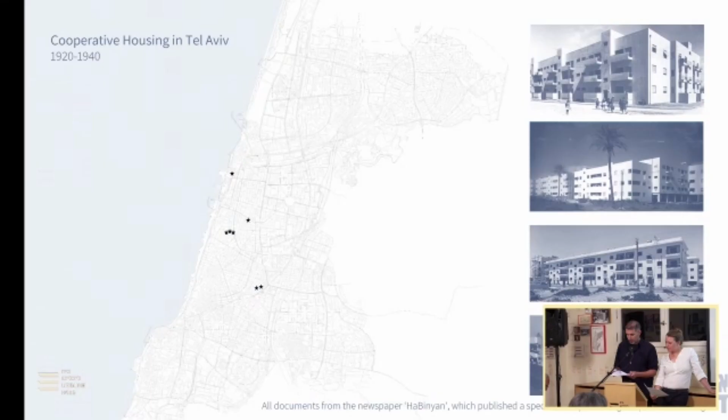We were happy to discover that cooperative housing is not a new idea in Tel Aviv. About 100 years ago, workers' housing complexes were already being built here by independent cooperatives without government support. Through shared responsibility, efficient use of space, and shared services, workers were able to create high quality and affordable housing even in Tel Aviv.

Thus, there were two main and successful models called the Comb and the Wall. The Comb layout provided excellent natural ventilation for all apartments and created open, shared outdoor spaces. The Wall layout was organized around a shared courtyard that became the social heart of the community and symbolized both community life and a connection to the land.

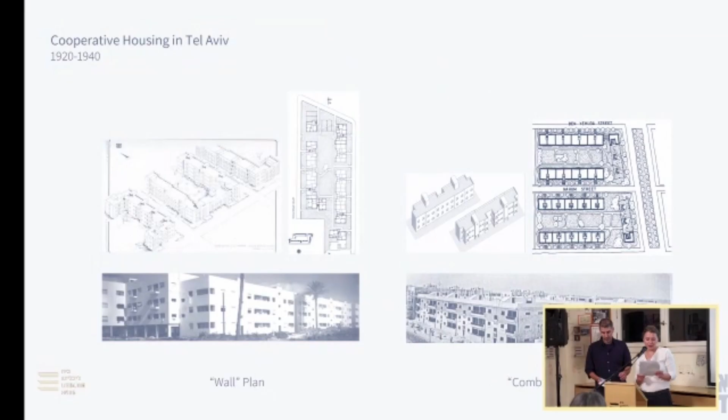These housing projects were designed by architects, many of them immigrants from Germany, and influenced by the Bauhaus movement. The architects were selected through public competitions in which future residents were also represented. Residents were active participants in the process, and the main goals were quality of life, efficiency, and simplicity, as you can see in the picture.

As part of the design process, architects carefully studied the local climate. The result was an apartment layout that still influences housing design today: a generous living room connected to a balcony, more compact bedrooms, and utility spaces in between.

We also looked at contemporary examples from abroad. One of them is Spreefeld in Berlin. The project grew out as a resident protest against a large urban development plan.

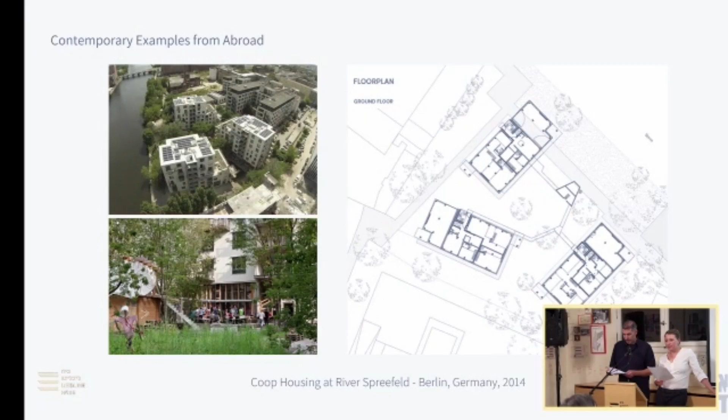During the struggle, the community formed around the idea of cooperative living and open urban life. These residents themselves initiated, planned, and developed the project as a cooperative. As a result, the building includes shared kitchens, workspaces, gardens, and public access spaces that encourage interaction and community life, both among residents and with the surrounding neighborhood.

Another project we studied was located in Denmark, and unlike Spreefeld, which grew from activism ideology, this project was created by a group of families who simply wanted a stronger social connection and more cooperation in everyday life.

The architecture strongly reflects this idea. The building is organized around a large central courtyard with an open facade facing inward, while the facade facing the street is more closed and private.

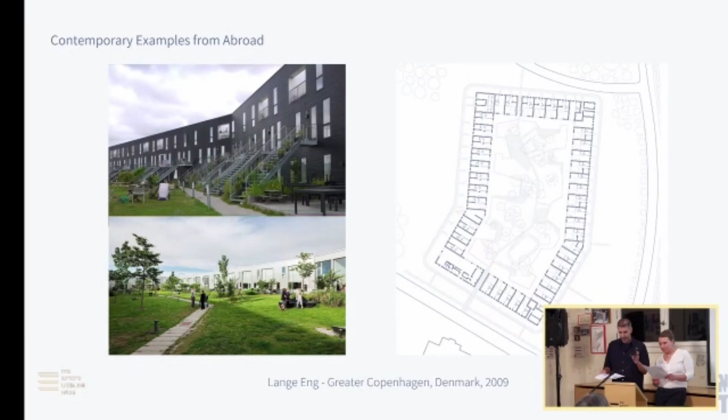As we mentioned before, our task was to help the municipality understand the planning possibilities of the site. The starting point was very challenging and a bit disappointing: a large site of approximately 2,500 square meters, around 120 housing units, and no existing community to design for. So we had to think carefully about how to create cooperative housing for a community that did not yet exist.

To avoid a tender that would only suit a large organization, we explored 3 different planning options. After evaluating them, we decided to move forward with the second one, which divided the project into several buildings. This approach allowed smaller groups of communities to participate as well.

Similar to the Spreefeld project in Berlin, we created an open and shared courtyard that encouraged movement, interaction, and connection with the neighborhood rather than a closed residential compound.

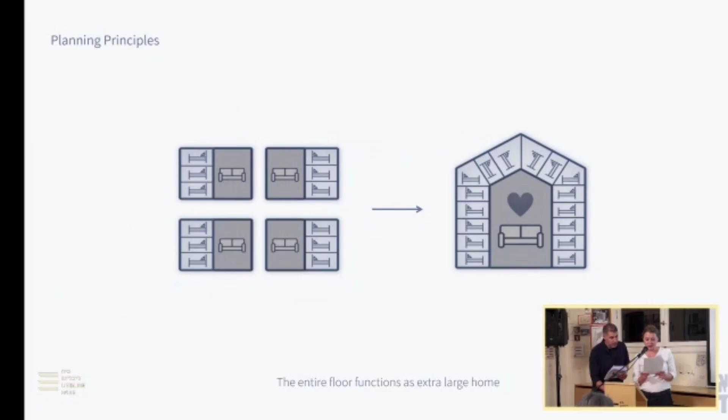Because cooperative housing is based on households that are not related to each other but still share parts of everyday life, we decided to reduce the shared spaces inside the apartments to a minimum. Instead, we created shared spaces on every floor. As a result, each floor functions as a large shared apartment.

Basically, when residents leave the elevator, they enter directly into a shared living space with a kitchen and lounge area rather than a narrow corridor. This gives the public space real meaning and makes it an active part of everyday community life.

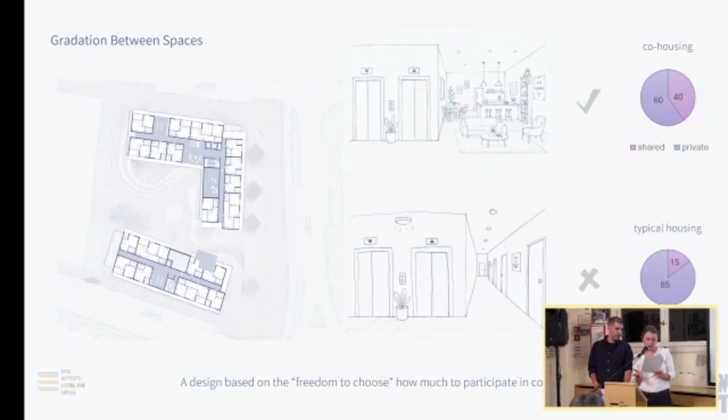In this case, about 40% of the building is shared space and 60% is private space, while in typical residential buildings the ratio is usually closer to 15% shared space and 85% private space.

Another important topic for us was flexibility. Each unit was designed using a fixed grid that allows the community to grow and change over time. This provides a solution for different household sizes and different stages of life.

Combining different apartment sizes on the same floor creates a diverse mix of residents - individuals, couples and families - and supports a rich and diverse community.

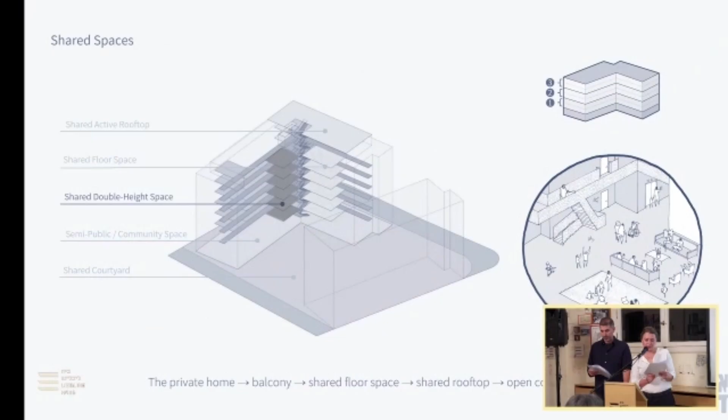So the entire building, as you can see, is organized around a large network of shared spaces, including an open courtyard connected to the neighborhood, shared indoor and outdoor spaces for residents, and double height spaces that connect pairs of floors and create smaller communities within the larger building.

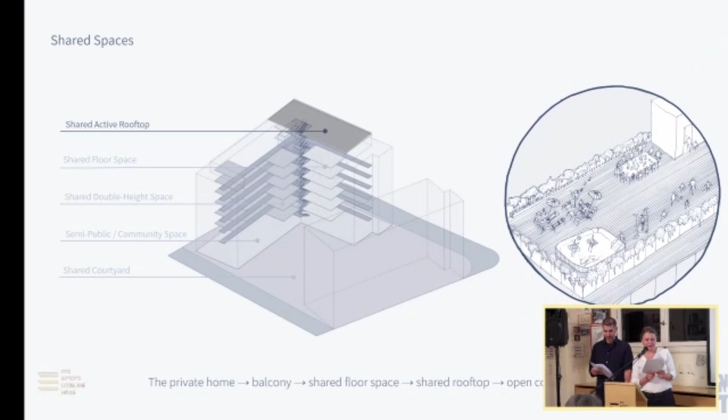There are shared kitchens, workspaces, and playrooms on every floor, and a rooftop terrace open to all residents.

The building facades were designed to explore different ideas of openness and community. One option was to emphasize the private units and the shared balconies, and the other features a continuous balcony that inherits a stronger sense of community and encourages everyday interaction between residents. The plan, I have to say, is the same - it's just the version of the facades.

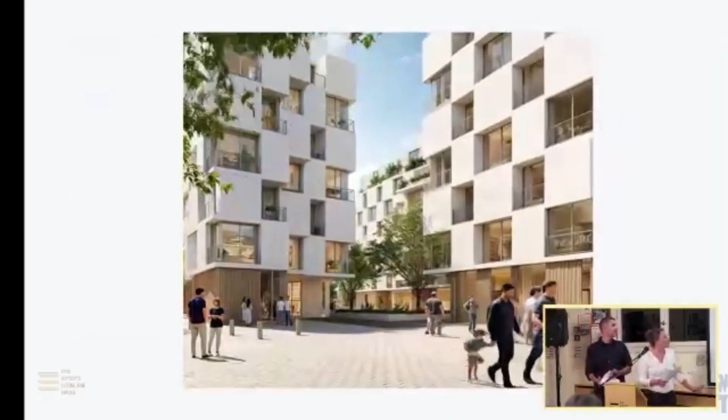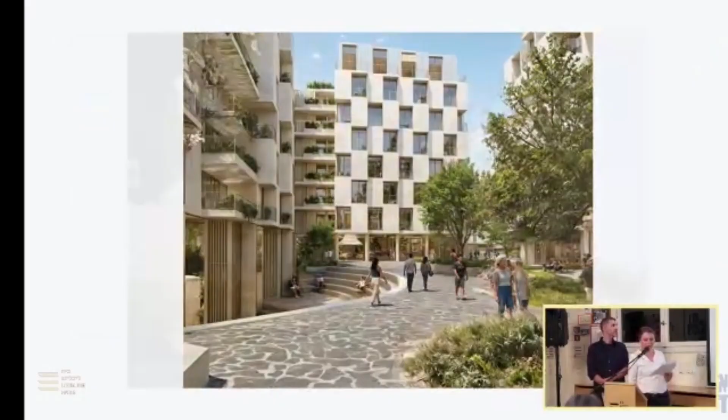So in the end, this project is not about inventing a completely new way of living. It's about rethinking an old idea, such as community, cooperation, and solidarity, while exploring how architecture can create the conditions for communities to thrive in the city. And perhaps it's also about designing places to help people connect, belong, and overcome the growing sense of loneliness that many people experience in urban life today.

So we hope that whoever wins the tender will succeed in creating a new way of living in Tel Aviv. That's it for now. Thank you very much.

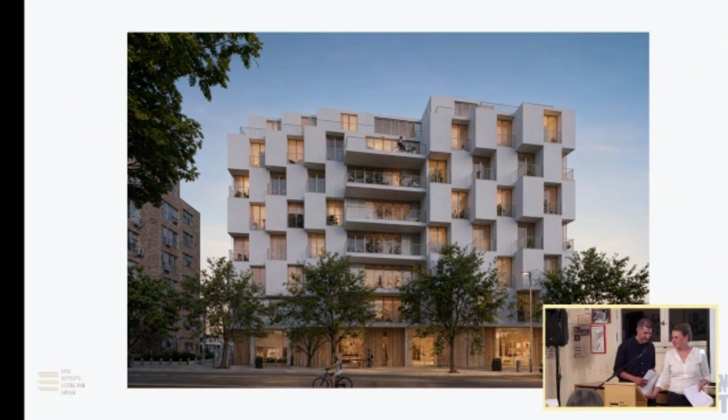Thank you so much. Thank you, Thoma and Ani. It sounds like a lovely place to live in, and you'll see later that we have nearly the same here in Frankfurt, or close to Frankfurt. It matches perfectly.

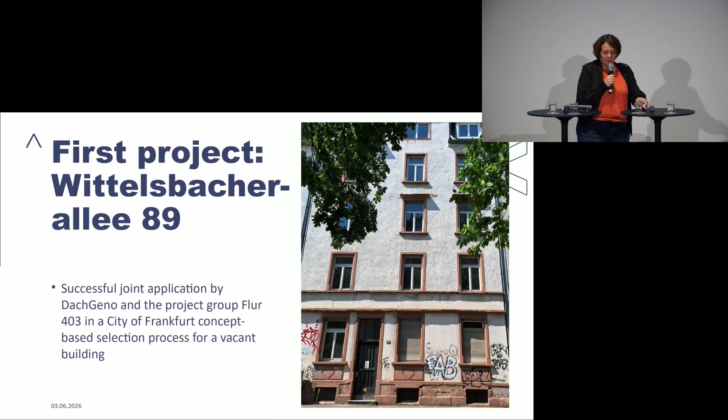And I will tell you a little bit about the project as well. So first, I will not talk about the specific planning, but more about the group and the concept. It's an intergenerational concept.

For us, it was important to have a diverse group that wants to live in this building, with people with different ages and backgrounds who can live together and support one another. On the other hand, it was important for us to focus on long-term affordability. As a cooperative, we will not get profit from the rent paid afterwards, and we have a collective ownership structure, and we will also provide public housing subsidies so that rents remain affordable in the long term.

Also important for the concept: this is a very old building, as you can see in the picture, and we want to bring it to a more sustainable development. We aim to combine ecological building practices with viable solutions so that this building will no longer have such high CO2 emissions.

To the more specific planning, I have some key features of the project I wanted to talk about. It's not as big a project as the one we saw in Tel Aviv - it's only a small house, containing 10 apartments. But we try to design flexible layouts for different household types.

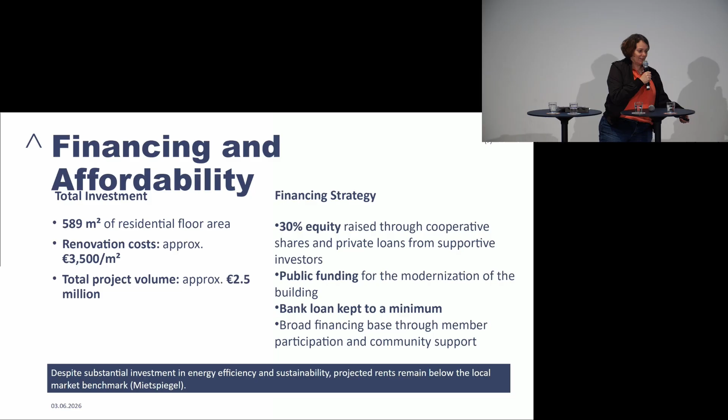And this is, I come to an end now. I think I already talked. No, it's the other way around now.

The last thing I can say is, if you want to support our mission of becoming a greater player in the Frankfurt area and purchase as many buildings as possible in the near future, you can become a member, because we want to add on the idea of cooperatives that was already developed in the 1920s and become a strong cooperative, or you could even invest with a small private loan. Thank you for your time.

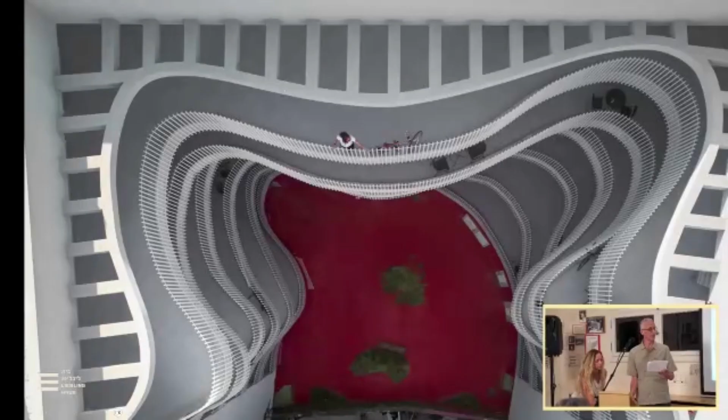When we think of an urban kibbutz, we usually picture communities that come together around a clear ideology or shared vision. But tonight I want to talk about a community that grew from completely different soil, out of need and scarcity - how planning constraints and architectural decisions can actually create a community.

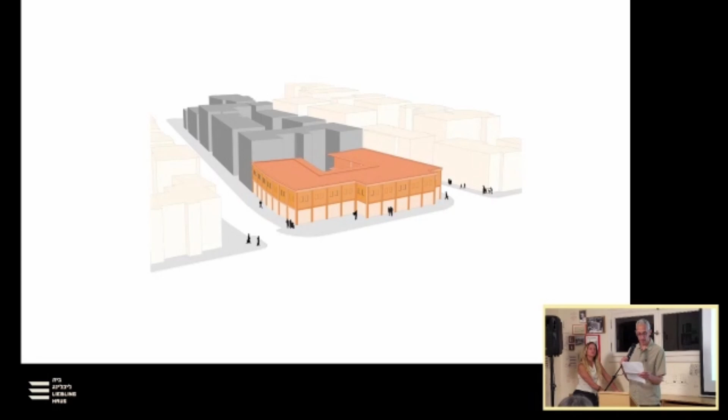So in 2010, when the buyers of the lot approached us and asked us to plan a residential project on this site, we took the task very seriously. We realized this was no ordinary project. The question was not just how to build a new building, but how to heal a broken place. The lot size is 1,000 square meters, with 3 facades facing streets and the 4th facing neighboring lots.

One of our first challenges was that not all the residents agreed to leave. After a long negotiation and a legal process, we understood that we had no choice but to keep a small part of the old structure, which was occupied, and build a new building on top of it.

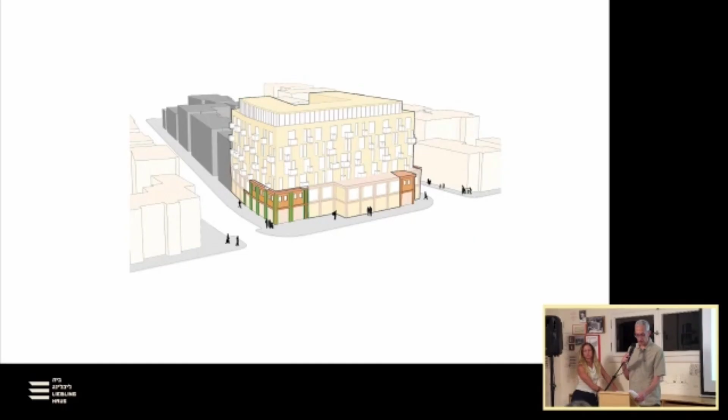The client's requirement was small, affordable units of about 50 square meters, meant for young professionals. The zoning for this area allowed for a commercial ground floor with 5.5 residential floors above it. The building rights allowed us to build 55 housing units of this size.

So how do you fit 55 apartments into 5.5 floors and still allow cross ventilation for all of them? Our main design decision was to break away from the standard Tel Aviv typology. Instead of a closed block around a central core, we chose to invert the box. We pushed the building to the street lines and designed the apartments around the inner courtyard.

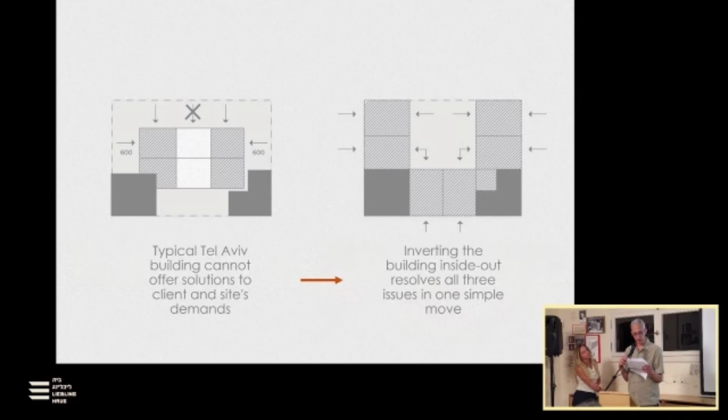The typical floor plan includes 10 apartments. Each unit is around 50 square meters and includes 2 bedrooms and a living room. The layout allows all the apartments to get cross ventilation.

On the top floor, we designed 5 slightly larger apartments. Yeah, this is the top.

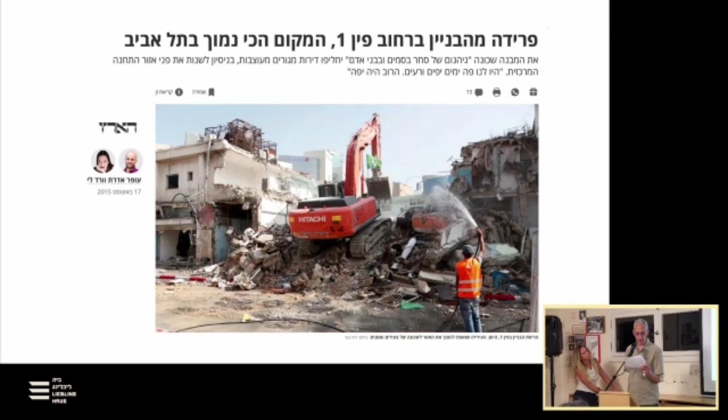In 2015, the demolition of the old building began. It was a major media event that was even broadcast live. Here you can see the building during construction and how we suspended the new structure over the parts of the old building that remained.

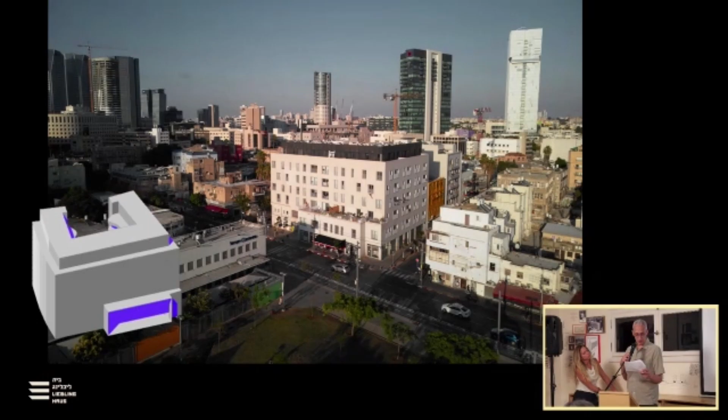And this is the finished building. The exterior facade is white and minimalist, typical to Tel Aviv, so the building blends quietly into the street.

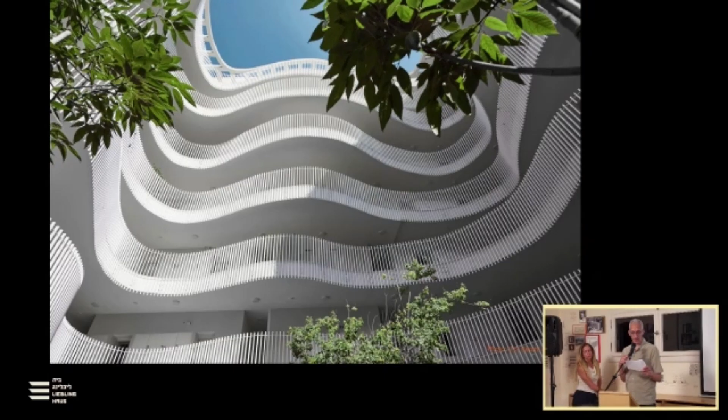Because we built right up to the property line, we couldn't plan private balconies for the apartments. So instead, we widened the open corridors surrounding the courtyard to create useful spaces for the residents.

These inner balconies were designed with a wavy shape, creating movement and constant eye contact between different floors. When a resident steps out, he can see his neighbor next to him, as well as those above and below. The balconies were designed to shade the open inner courtyard, creating a pleasant microclimate for most of the year.

The shading system and cross ventilation were not just about making the building green. They were mainly about making it more affordable.

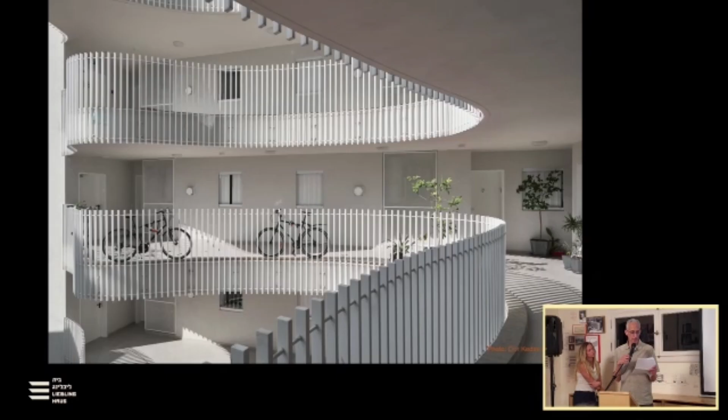The lack of private balconies turned from a constraint into an opportunity. It forced all outdoor life to gather inside the shared courtyard, which became the key factor in creating the community dynamics. Daily actions like smoking a cigarette, watering a plant, or talking on the phone happen within the community space.

white exterior that helped the building blend into the street. This contrast defines the border between the city and the home, creating identity and belonging.

Construction was finished in 2020.

Back online. Hey, Sharon, can you hear me? We lost you. Okay, we don't hear you yet. I can see myself from behind. That's creepy. Okay, still working on it.

While we do that, I just thought, don't you think an aspect is also that you can put your money somewhere and do good? You said it's for education, but if you have money and the alternative is to give it into an ETF and pay, say, Rheinmetall or any other weapon-producing company your money, and you know what they do with it. The alternative is to put it into a project like this, and you can walk along and take a look at what your money is doing. Don't you think that's also an aspect?

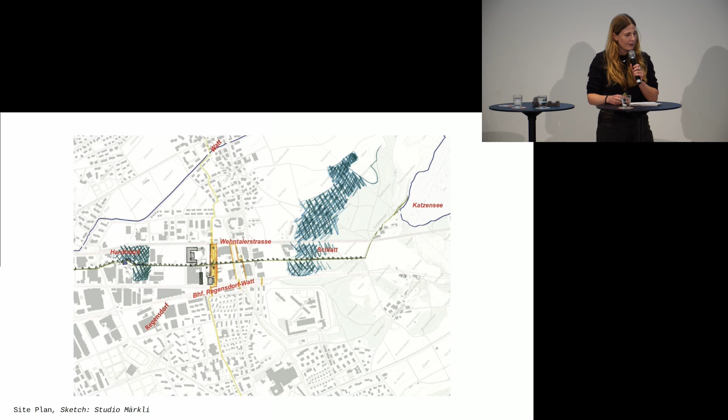Zwhatt is part of a development area in Bahnhof Regensdorf-Watt. Regensdorf is about 15 minutes away from Zurich main station. There are 17 plots along a big promenade in between, which connects two nearby recreation or greening areas. You can see it here on the sketch: Schlatt and Harthölzli, and the promenade is the connection between them. Our client is the Pensimo Management Group, and they developed the Zwhatt area alongside this promenade on several plots.

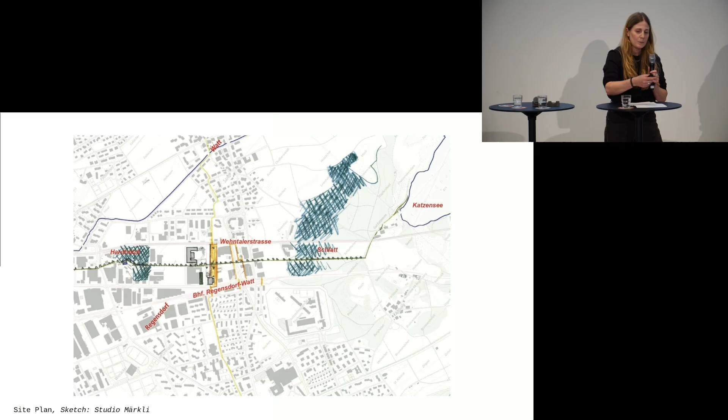There are two plots named H and G. They are more or less completed, and the first tenants moved in 2025, last year. And there's another one where the planning is ongoing, and there were some competitions last year which were won by Salate Architects from Basel and Doskre Architects from Zurich. And Zwhatt itself is based on a master plan by Peter Märkli Architects.

You can see one of the first sketches from him here behind me. And Studio Märkli was also in charge of some of the buildings on the area on plot G on the right, including the second high-rise and also a lower residential building aside with a kindergarten, which we call the Querbau. Same situation here, a different view. We can see the high-rise from Peter Märkli Architects and also the Querbau aside with the kindergarten and a big loggia in front.

Behind there's a commercial building from Graser-Troxler Architects. And you can see it on the bottom right picture, on the face to the promenade, on the corners of those plots, we have two pavilions from Alexander Brodsky. He's a Russian architect, and he developed those pavilions for the tenants.

On the first pavilion, you can see it here, we have a big cinema on the roof, and also some guest houses or guest flats to rent for the inhabitants. And on the other pavilion, we have a sauna, an event hall, and also a roof garden, which can be used from the whole area.

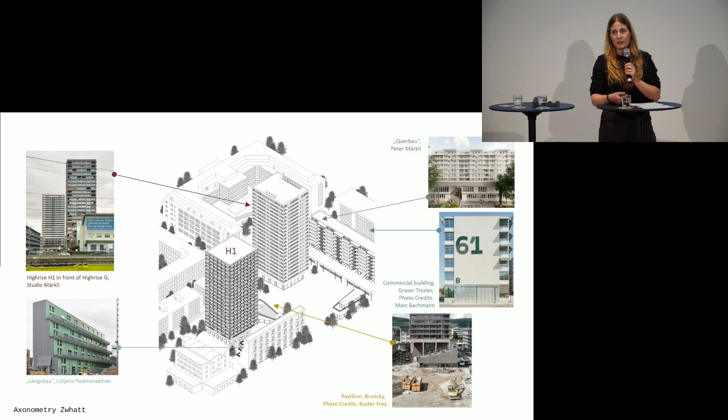When we talk about those two high-rises, we like to talk about them as brothers and not as twins. So they have a lot of similarities. You can see it here. They have the same height, exactly 75 meters, also similar proportions and dimensions, and they also have exactly the same color, this brownish red. This is one of the most published visualizations of the project.

But there are also a lot of differences, not only similarities. And the biggest difference for sure is that the Peter Märkli building or high-rise is a solid construction, while H1 is a timber concrete hybrid construction. And with its 75 meters, it's the highest timber high-rise in Switzerland for now.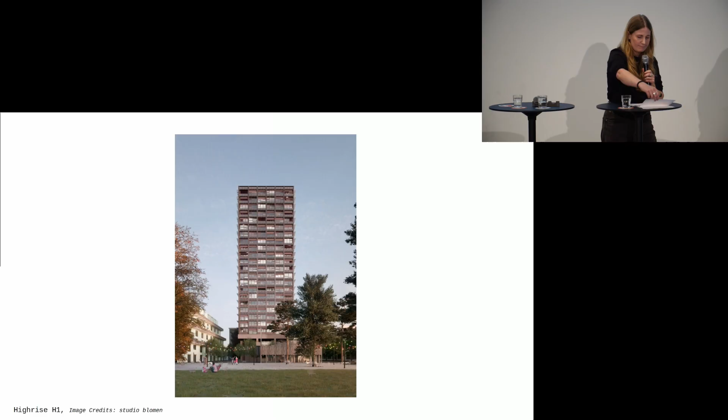In the base, there are mainly uses for the residential purpose. We have mailboxes, the entrance, and also space for a restaurant or a bistro. On level 1 and 2, there are co-working spaces. The 156 apartments, ranging from 1.5 to 5.5 rooms.

Starting from the third floor on, they are puzzled in, or find their place in this wooden structure. It's a light timber structure on 21 floors, which is basically puzzled around the core element per element. You can see it here.

The wood we used is beech wood, but it's not the classic Baubuche. I really don't know the English word for Baubuche, maybe someone knows it. Baubuche is basically beech wood, but it's laminated in thin layers with a lot of glue. In this case, we have squared timbers of 40 by 40 millimeters, and the product is called Stabbuche and is made from 100% Swiss and local wood. In comparison to the Baubuche, there is much less glue, so we preferred this product.

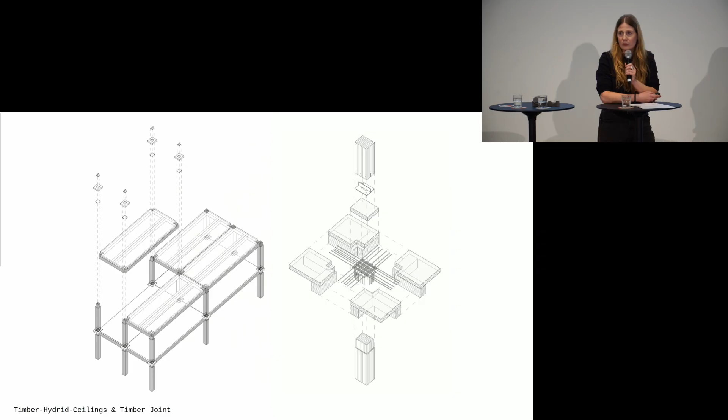Let's go to the detail. We can see here that the timber construction was prefabricated. So we have wooden columns and also timber composite ceilings with 12 centimeters of concrete on top of 30 centimeters of Stabbuche beams, wooden beams. The ceiling elements are connected to each other with a timber joint, and in the end you get this rigid floor.

Because of the high level of prefabrication, we only needed 1 week per level on site to erect the building. With only a few hands, the elements were brought to place.

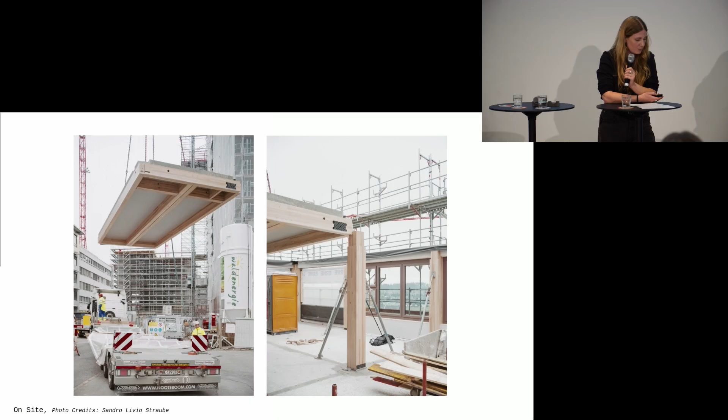Due to the fire regulations, the timber isn't visible from the outside. But inside the apartments, as you can see in those pictures, the timber becomes a defining architectural element or feature. Fire safety also plays a role here. The reason we are allowed to expose this timber is because we have a sprinkler system on the floor, which is not quite common in Switzerland for housing. You can see it here in the image - it's more like an ornament, not that bad, I think. It's industrial, but it fits the look of the building. We wanted to show the construction, so this was the only way to do that.

We have also a few figures here. By using timber instead of concrete construction, we had approximately 20% less CO2 emissions compared to regular construction, that's around 600 tons. Additionally, we had 1,500 tons of CO2 stored in the timber itself.

Now, a few words about the facade. The facade of the whole building reflects the inside structure to the outside. So the wooden structure, starting from the third level on the upper floor, lies behind the light metal structure. The most defining element for sure is the solar panel, which you can see here.

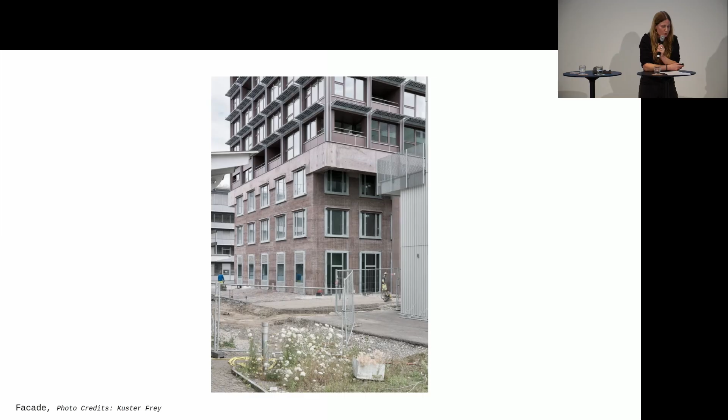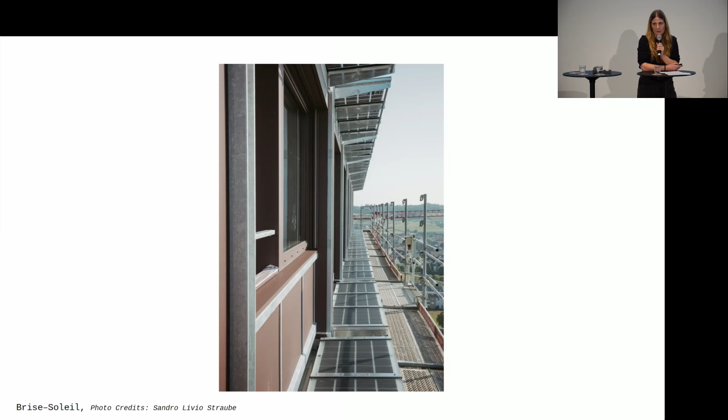Furthermore, the panels provide sun protection in the form of brise-soleil elements. And of course, we really like the architectural expression and the lightness behind it, which comes together with the light timber structure.

Additionally to that, we could also use bifacial solar cells with this kind of construction, which can absorb light from both sides of the panel or cell. Additionally to the extra area we could provide, we now have 10% extra yield just because of those bifacial cells.

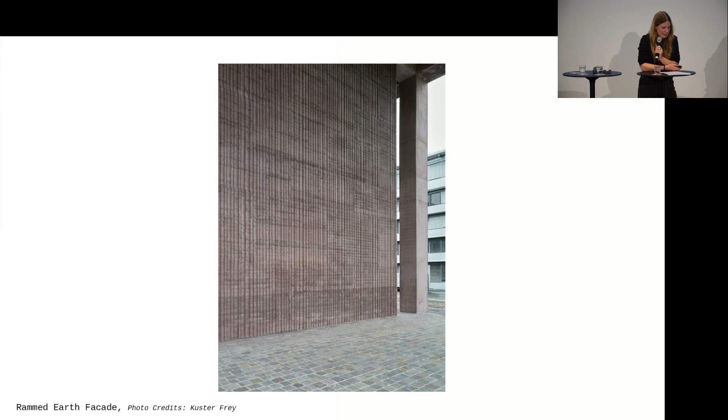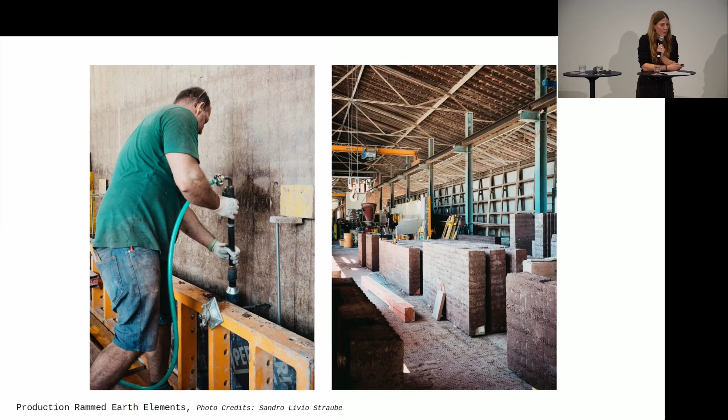In contrast to the fine and technological facade from the upper floors, the massive base comes together with a rammed earth facade out of elements. It's also prefabricated, and those elements were produced by Lehm AG in cooperation with Keller Ziegeleien. After they dried, with a long drying time, and after they were brought into position on site and fixed in place, all the joints were manually filled with clay to get a closed structure.

And with these images, I have reached the end of the presentation. I hope you liked what you saw, and thanks a lot.

I think Tel Aviv is up now. Yes, thank you very much for this inspiring talk. We found that the truthfulness of the material is very inspiring.

Although for us in Israel, maybe wood is not such a choice like in Switzerland, just because of the ecological footprint. But of course, this whole topic of sustainability should be discussed at large in Israel much more than it is up till now.

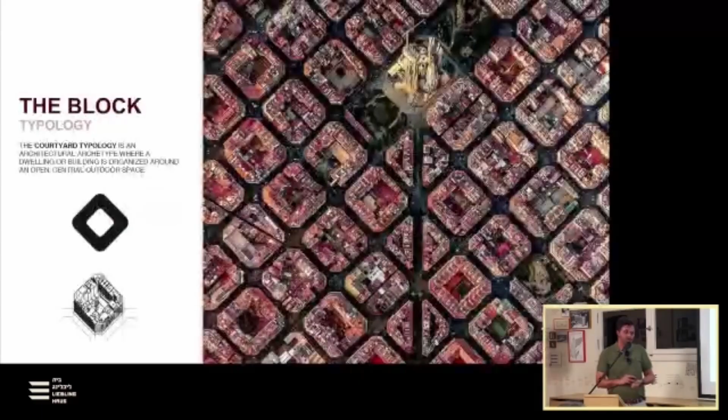We look at old typologies, then we can see the historical block here in Barcelona and other cities in Europe. I think it's a lovely typology stemming from the courtyard house. The great thing about it is it creates great community spaces in the courtyard and a lot of excellent aggregation possibilities for an urban fabric.

However, I think it's got its problems with adding mixed use. I tried and wasn't able to do it well in Switzerland actually, and also density is limited when we go to the block typology.

After the Second World War, I think the most prevalent housing typology was... is there a way to stop this from running somehow and move to a... is it working? Okay good, so let's go forward.

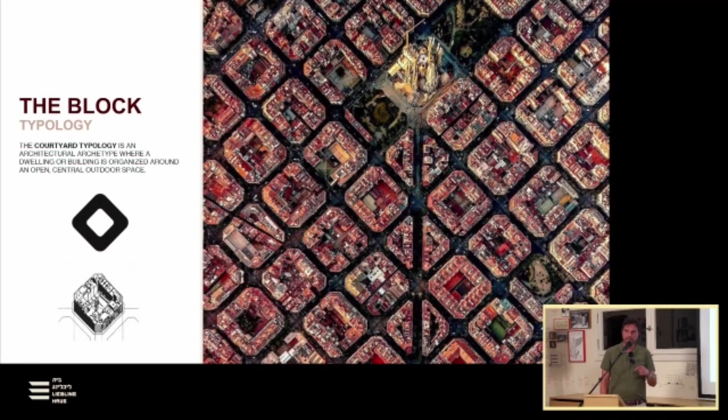One more. Okay, so we were speaking about the limits of the closed block, right? And about the central courtyard, especially with mixed use and also with density.

And we see the social housing blocks. You can see that on Alexanderallee in Berlin, or you can see that in the Eastern blocks. I think what it contributed mostly was, one, it allows more density, and also it created a little bit more public space, since the separation of buildings created community gardens between the buildings. And also it allowed maybe a beginning of a mixed use, since some building would have been residential, some would have been offices. But still it has its limits.

And I think if we move forward, we can see that nowadays this is more of the housing typology that we see in expensive cities. Mostly also not because we think this is the most beautiful image in the world, I think because real estate is expensive, land is expensive.

Thank you very much, Tadana.

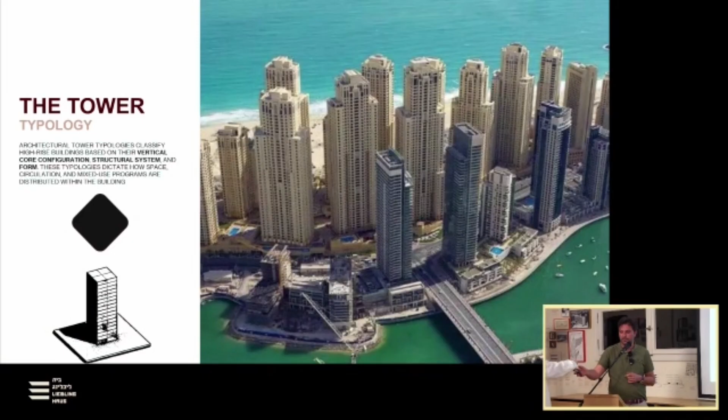And it does allow for a couple of things that our market needs. One is high density, and second is the idea of mixed-use towers. My office is right now under construction on about 15 towers just in Israel alone. So I'm not imagining that we're going to stop doing towers, but I want to say that one of the biggest difficulties is, I think, community.

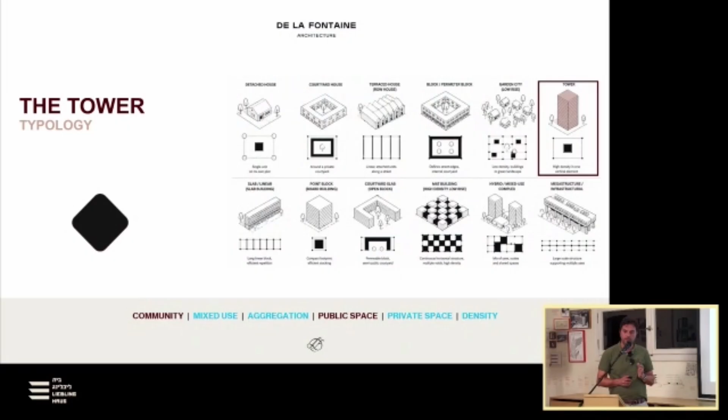People who live in towers are very isolated, lonely, and it becomes a very difficult thing. I remember my father, who's German, said that he hates towers, especially in Frankfurt, next to the beautiful Römerberg and all of the other parts of the city.

And yeah, now I do a lot of towers.

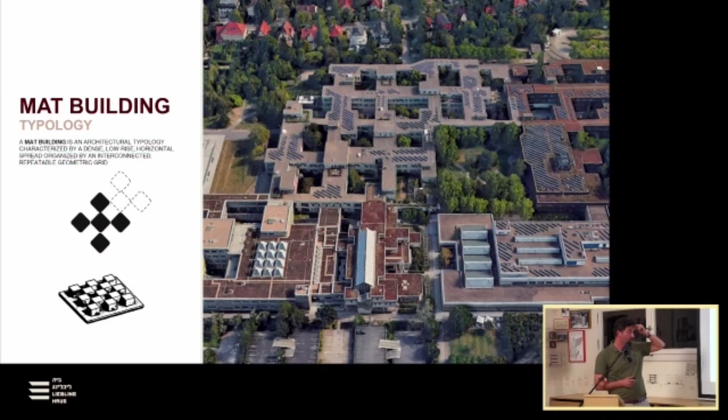Here we see a mat building, a typology that I first learned about during my studies at Yale University in the US. When you look at the mat building, we know here, we see the Free University in Berlin, but there are many other examples.

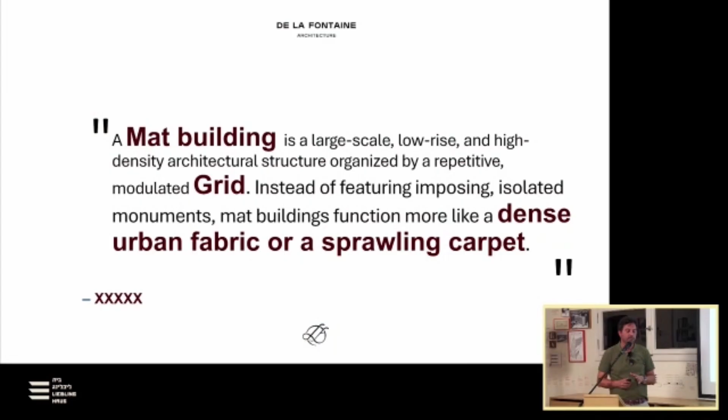It is more of a fabric approach of architecture. It has a lot of opportunities because a mat building is a large, low-rise and high-density architectural structure organizing by a repetitive modulated grid. Instead of featuring a building or a monument, it serves more as an urban fabric, and it creates a sprawling effect as it can grow, creating a lot of pockets of space, which is interesting since it also allows for density.

But here you see the project that I studied during my studies. This was my thesis study at Yale with Peter Eisenman, and you can see historical pictures of the Venice Hospital. That was an incredible project that was never realized by Le Corbusier, which phenomenally sprawls over the canals with its arms and wings.

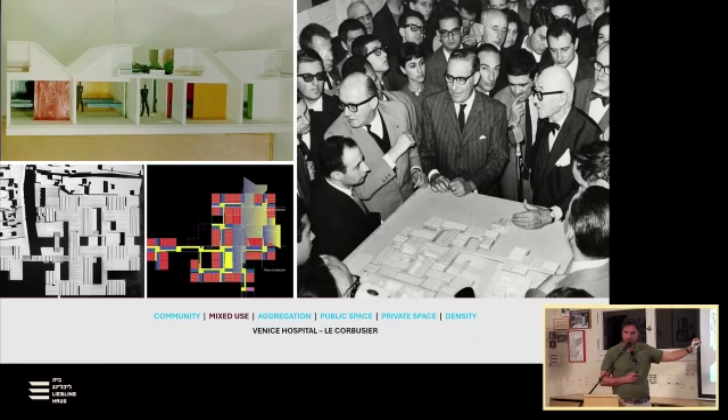The idea was a highly organized bottom-up architecture, almost parametric architecture, with the red being hospital bays with the right sizes, the yellow lines being circulation, and the blue being the service areas. There's also something very asymmetrical about its growth with the pinwheel structure here, but there are many different mat buildings, and how they aggregate is different.

During those studies, my question was, can a mat building actually achieve density and mixed use? And can it actually, rather than just being a public building, which most examples were - schools, hospitals, university buildings - can it actually serve private space?

This was my thesis project. It actually won a lot of awards due to its idea, I think mostly because what was actually novel about this idea was to incorporate social housing over public space.

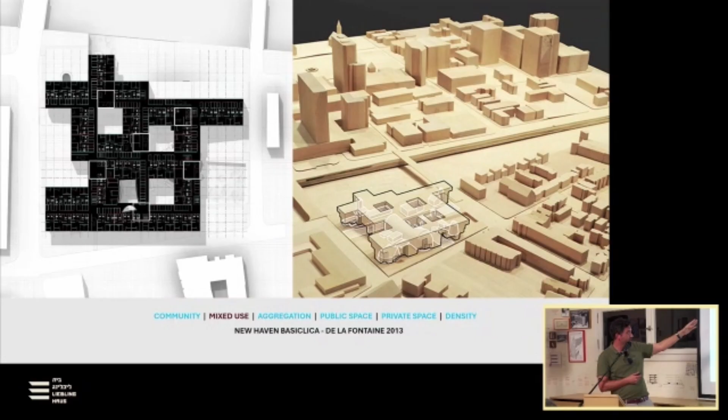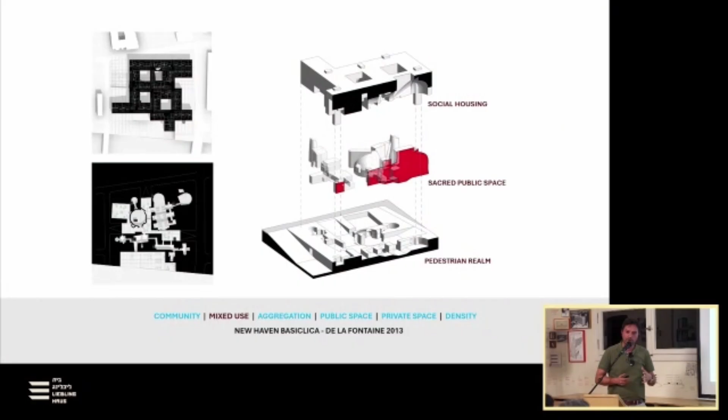The public space below and the private housing on top - you can see that the bays were organized very similar to Le Corbusier's plan, with a pinwheel structure and corridors and depth of apartments with a single loaded corridor. And slowly from below, we see the erosion of public space in a very sculptural way, almost like a Noli plan of Rome, cutting out of this very repetitive and structural idea in a very intuitive erosion, which basically created exciting sections of sacred space on the ground connected to a pedestrian realm that cut through the site.

But that's all good and nice, and we wanted to actually try this in real practice. The real practice was in, I think, 2023, when a client, Landmark Architect, came to me in Belgrade, and they said they had bought an amazing site but couldn't solve it. Multiple architects had tried. It's an amazing site.

It's actually sitting in a historical context, right where the meeting of the two rivers happens, the Sava River and the Danube River, which makes Belgrade very important. The tale of this city has a lot of history from Ottoman and Viennese architecture and struggles and wars, which makes it a very eclectic architectural space.

But also the geography and topography of the city doesn't really allow for towers. So on one hand, they want density. On the other hand, the city doesn't allow for towers. So I had to think of something, and I went back to this thesis project.

Now, what is the public space that we want to bring into this project? No one wanted my basilica from Rome. What they really wanted was something useful to the community in an area of regeneration.

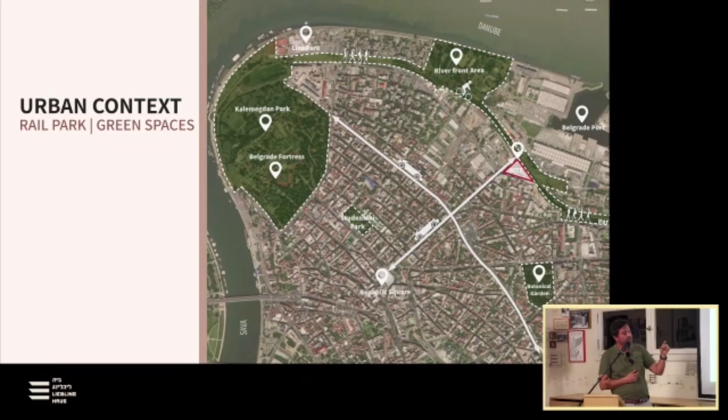There too, they recognized that the old train tracks are no longer used, and could be used as a connection point for pedestrians to move from one park to the next. Development sites along that spine would revive an industrial area, the old port area, where a lot of potential still exists, bringing us to Kalemegdan Park, an incredible historical park of Belgrade on a hillside with its fortress.

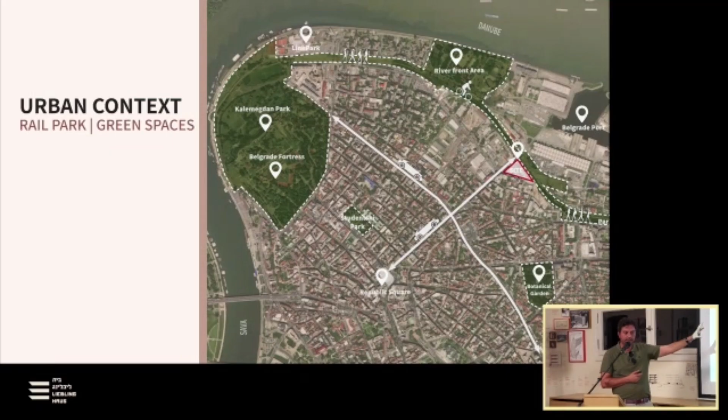The site itself had a very difficult geometry. I won't go through all of it, but there was almost no typology that would allow for the density that was approved. Sometimes a high density approval exists with no way to achieve it, and the landowner buys it thinking an architect can do magic.

The limit was not to go over 10 levels, and also to preserve certain distances from buildings, and allow a fire truck to go around. So these building lines were not even the real building lines — we had to set back even more.

I also want to mention the beautiful neighborhood of Dorcol, a historical neighborhood that's a little run down, but it became the Williamsburg of Belgrade, with bars, pubs, and culture — a very cool, hip area for young people.

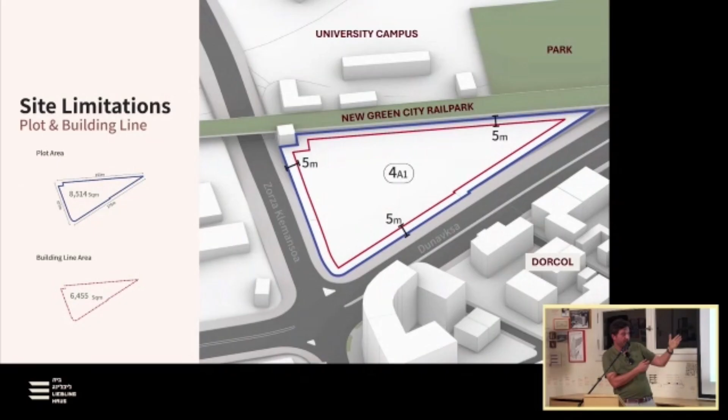On the other side you see the university campus and the park. So we're literally negotiating between public space and private neighborhood on this site — a lot of responsibility for one site in that triangular condition.

The typical closed block was, I guess, the first solution, which we saw in the beginning. But we couldn't achieve it — we couldn't achieve the mixed use, we couldn't achieve the density, and the repetitive long facades were very difficult architecturally.

So we reversed the logic, and instead of the closed block typology, we went into an idea of an open block — basically the mat building I was searching for to begin with.

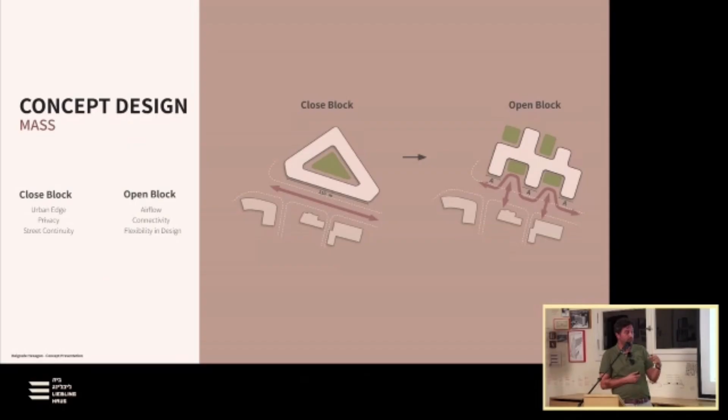In the diagram, the open space, the public space, instead of serving just the tenants, serves both the tenants and the neighborhood, opening to the city and to the park — because the park is very narrow, with bikes coming, so you have to constantly move. We created a break within our site, making public space for people to stop and pause.

I'm in love with this — it actually became a keychain shape for the people who bought apartments. Why a hexagon? Because it's a triangular site. When we tried an orthogonal mat building, we couldn't fit in the areas. But once we acknowledged the triangle and worked with the angles, this was the shape that aggregated and achieved much more square meters and apartments inside the project.

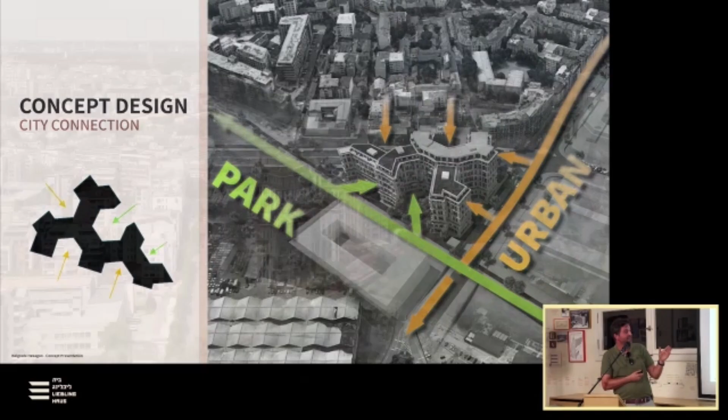Our architects worked extremely hard on the apartments with this shape — here is a rendering of the project. You can see this is an example of what we can do besides towers or bar buildings, while still allowing for high density.

In Tel Aviv, we can do this, and in Frankfurt, we can do this. This project serves so many different ideas at once, while still achieving the developer's goals for mid-income or lower mid-income housing.

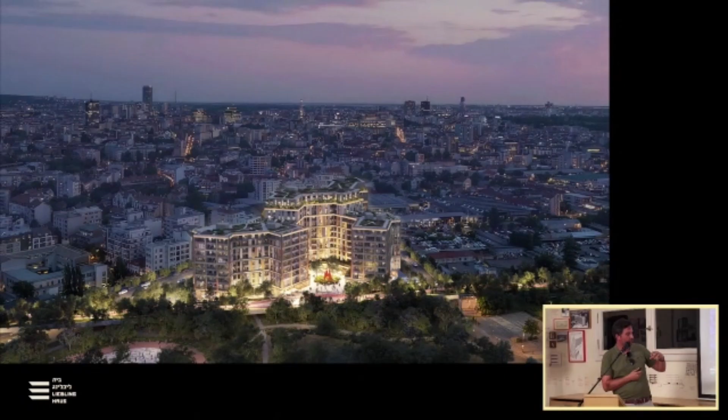I love this image because it shows how the building becomes a portal to the city, pulling people through the site. Here you see the linear park, the rail park, opening up to our building, with the building becoming almost an envelope for public space rather than an object.

We also tried to work with scale — when we looked at blocks and buildings in Belgrade, there was a certain proportion to them, because they weren't built all at once. You'd have a 15 to 20 meter wide facade that changes over time. In these cuts you can see we created a kind of rhythm that has a human scale.

And here we see how that rail park runs right along it, and it creates a really interesting rhythm.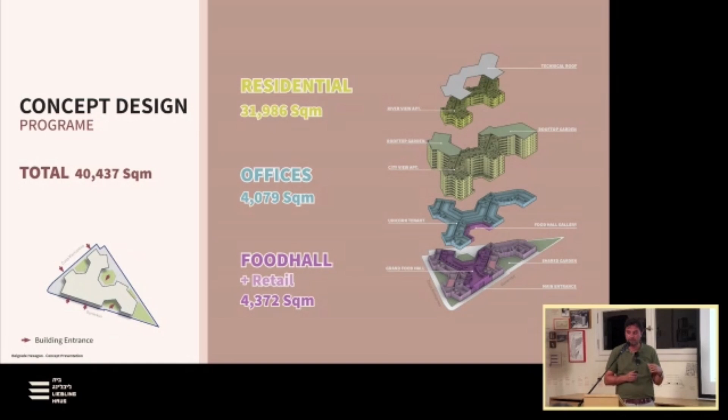As for the private, or let's say enclosed space, there are two main factors we consider: semi-private and public space, which is the couple of lower levels. One is a big food hall, 4,300 square meters, a huge investment by the developer to create a major public space for the neighborhood. On top of that, offices allow this project to survive all hours of the day, so it doesn't turn into a difficult daytime or nighttime experience.

Here you see how we tested this project. We had to find where to enter, how to bring in the cores, how to situate things. So we created 4 fictional characters, 4 architects in my office.

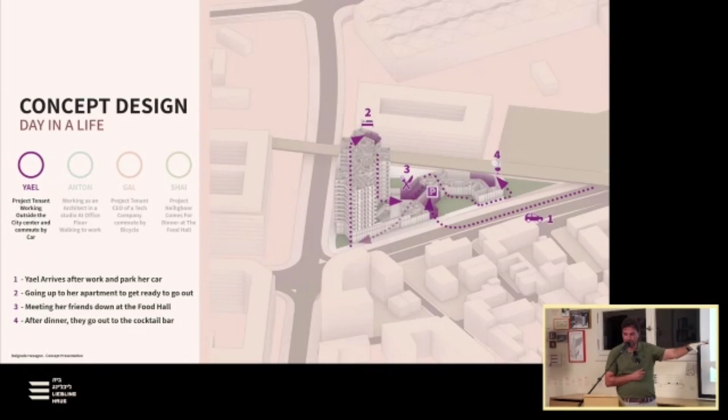Yael is one of them. She imagined herself being a tenant that arrives after work, parks her car, goes up to her apartment, then meets her friend down in the food hall, and after that can just go into this beautiful neighborhood to catch a drink. This is just one scenario.

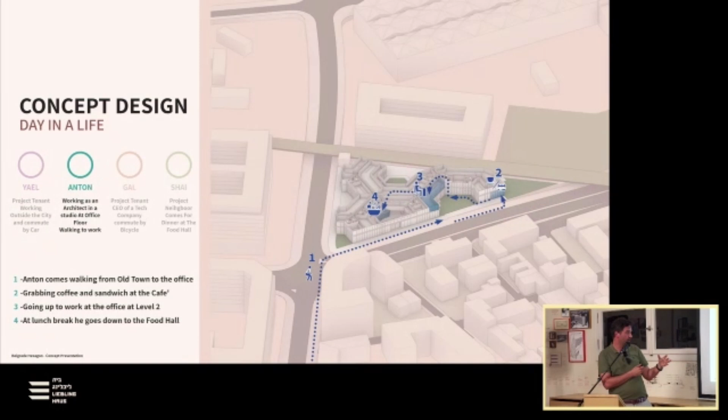The second scenario is Anton, who doesn't live here but comes to work in his office, grabs a coffee in the morning, and has a lunch break at the food hall.

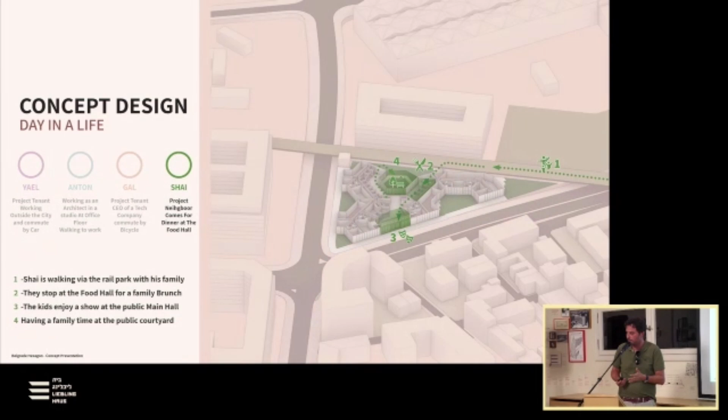Finally, we have a tourist or visitor who comes on the weekend with his family and kids and enjoys the park we've created for a weekend brunch that spills out into the piazza.

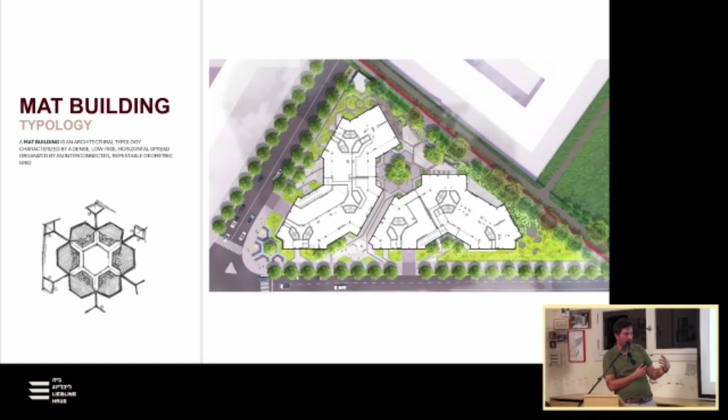When we looked at the circulation, we saw that this building has a very large perimeter, which created a difficult block condition for people. We wanted to bring people through the site, especially because the road on the left has very difficult sidewalks and leads onto an underpass. So people will actually move through the building, which activates the retail, allows for a lot of potential for the restaurants, and connects back to the rail park.

I promise I'm almost at the end. Here we see a rendering of how that building meets the park, and how with that slight angle of the hexagon, it pulls people into the site very gently rather than meeting it at 90 degrees.

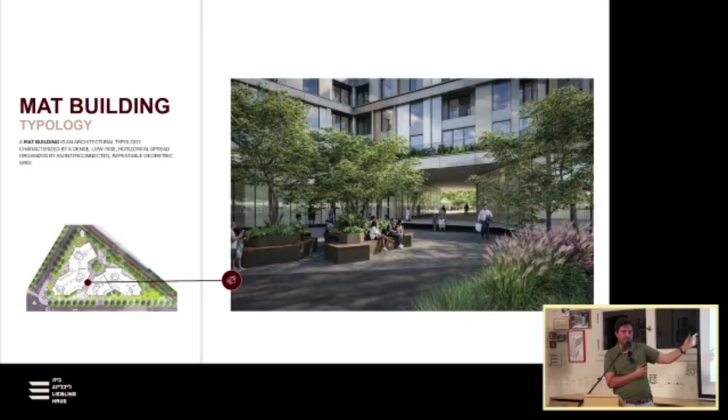Here is the little piazza we see on the park side. We see the underpass, the passage that cuts through the building, and then the piazza, which has an urban feel on the other side.

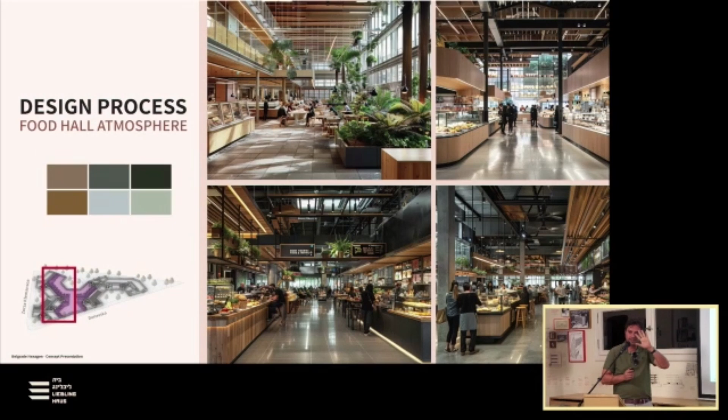Food hall renderings. These were our early food hall renderings for the ground floor, which are completely disconnected from the residential experience above, and activated.

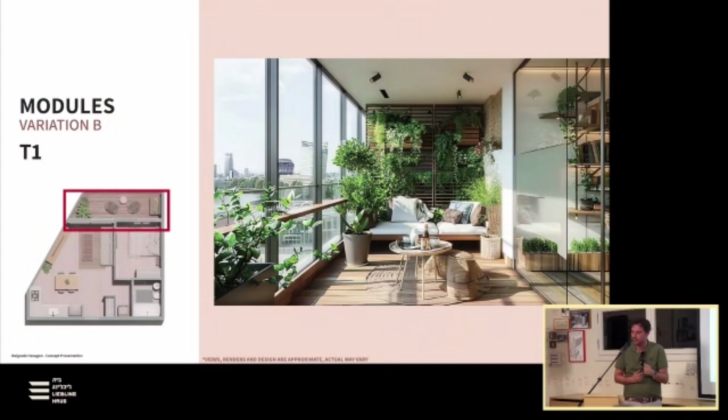That's it. I want to thank you everyone. Sorry for the technical difficulties.

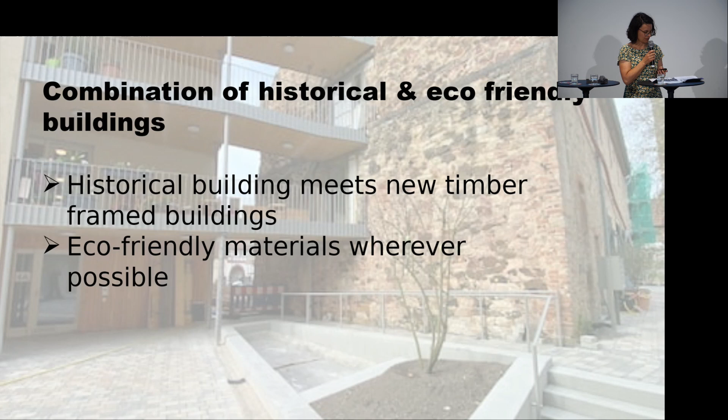The new buildings, as you can see on the next slide, are all timber-based - that's the construction of the new houses we have. They are also certified with KfW 40, which is the new building standard, and we're also looking into a certificate from the Deutsche Gesellschaft für nachhaltiges Bauen, where we might be receiving silver - something very important to us. Those buildings combine private apartments with spaces for cultural events and social interaction.

Here you can see the part of the old building. The doors you can see will be the communal spaces - one part for residents only, financed through the renting costs, and another part will be open to the public that we're still looking into how we can use for cultural events and things like this, so this is going to be interesting. Unfortunately it will only be ready end of this year or beginning of next year, but this still gives us time to think about concepts and how we can use it properly.

The courtyard you can see in the front is already pretty in use in the last couple of weeks. We had lots of birthday parties and events, sometimes private concerts from residents who just take out their music instruments and sit there - it's really, really lovely. The children are playing, we have boule and speedminton dates outside, so it already gives a good sense of community there.

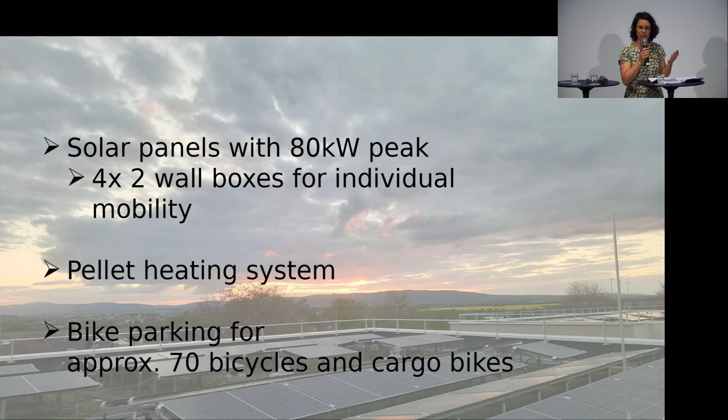Having so many parking spaces and being more or less only with bikes is still pretty rare. We have lots of cargo bikes that we use for shopping and children's transfer, so that's part of our approach to the energy transition as well. Car sharing will be part of our discussions too - currently we don't have an organized structure yet, but we do already use private cars that we'll be sharing, so this is just something that has to develop with the people living there.

And that's the Taunus in the back that you can see. To mention, you can also see Frankfurt from the rooftop terrace, which is really lovely. So it's not too far away.

What was also important for myself to move there was the way the project is organized. We've heard it already a lot, so being able to participate in decisions, having the organization and all the financials taken from the residents to the residents. This comes with the Ökogeno that we are part of. There's this umbrella organization, and for Ilbenstadt itself we also have a small corporation called Ökogeno SWH. So we are all part of this, and this gives us the flexibility to have our say and vote and be part of the decisions being made.

The project itself is also self-organized, so for all the daily business that needs to be done, we use sociocracy to organize ourselves among the residents. That's just being established, and it's really helpful. Last but not least, I want to give you an insight on the different forms of living.

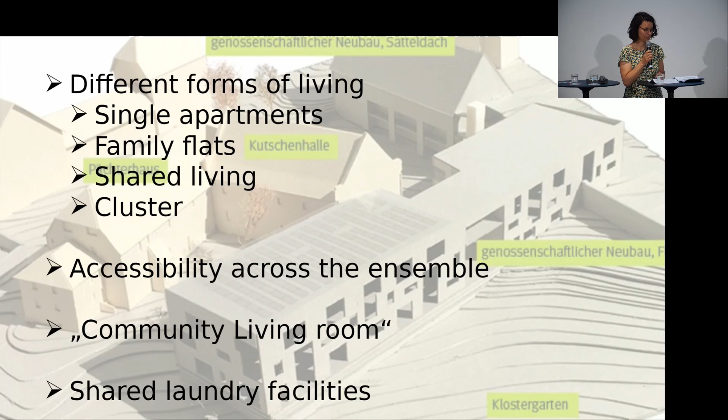Yes, that's here, and that's the layout for the 5 people's cluster. It's quite similar as well, again with the private spaces that we have. In case anyone is interested to go to Ilbenstadt, we still have spaces in this cluster.

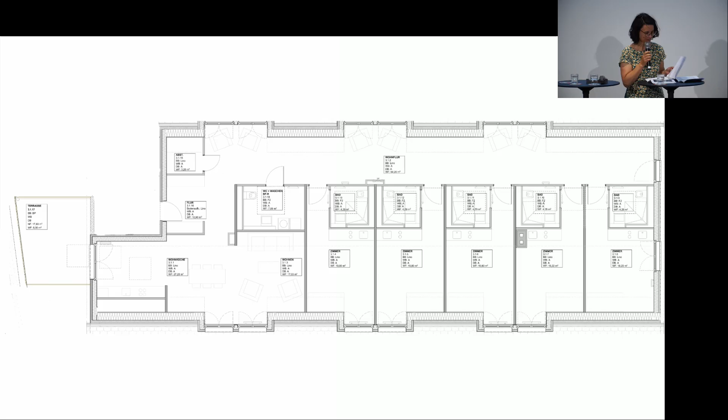We're experiencing that not only the shared rooms you have in a cluster are really interesting and important, but also the additional support that comes with the community and the commitment to live in such a cluster. Currently for myself, we do have joint grocery shopping. You always have someone around in case the train runs late again and the children are already on the way home. So it's really the interaction and the support that you can already see, which is really nice to have this way of living, which is not that common yet, but maybe this is something we can see in the near future.

As I said, we are still at the beginning in Ilbenstadt, but it is really worth trying. Yeah, and that's it. Happy to be here, and thanks so much.